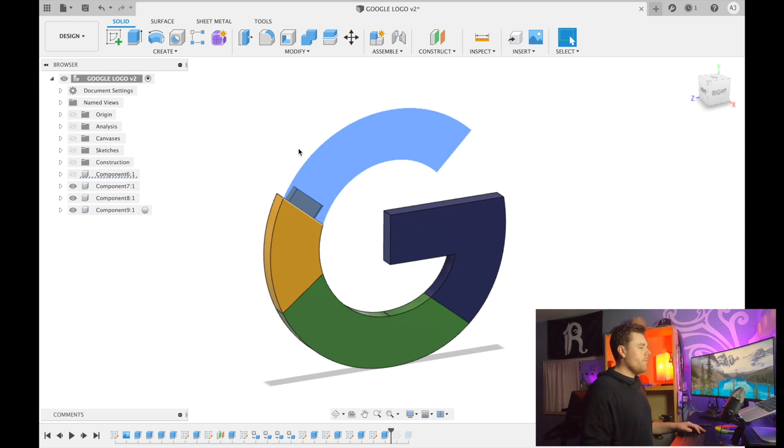Let's get started. Once we're in the Fusion 360 workspace, you'll notice I have 4 different components for this Google logo, each a separate color. I'll hide the first component so we can see I have an intersecting feature, which is this slotted extruded feature, to allow more surface area upon contact of the two 3D printed materials.

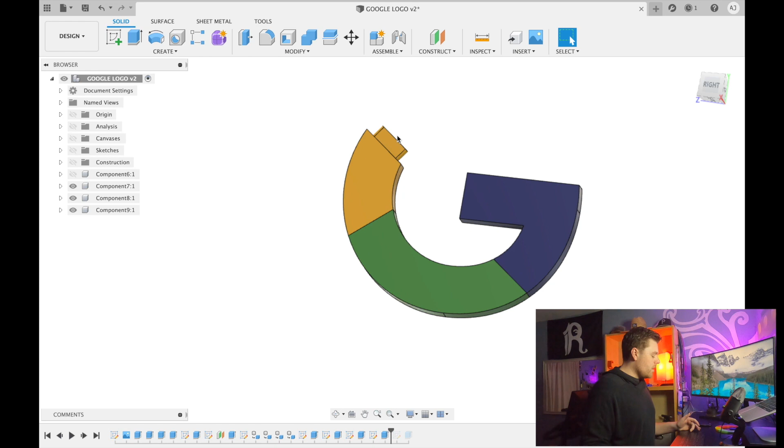If you have a single-headed extruder and plan on creating this all in one color, you could simply import the SVG file and export it as an STL file. But if you're utilizing a dual-headed extruder, it makes sense to have more surface area in the X and Y direction, so it utilizes more contact area and doesn't just split down the middle, like it would if you relied on contact surface area in the Z direction. So this is what I came up with, and it worked pretty well.

These are pretty strong, right? The yellow and red are the same print, just 2 different extruder colors, and that's not going anywhere. This is a press fit feature between the yellow and the green, and then the blue and the green again are just like the red and yellow. Excuse this for not being a very correct representation of what the green should look like in the Google logo—it's what I had.

Now, if you have a single-headed extruder and access to all these different colored filaments, although a little tedious, you could essentially create the same snap fit feature I have between the yellow and green, and do that all the way across throughout every single color.

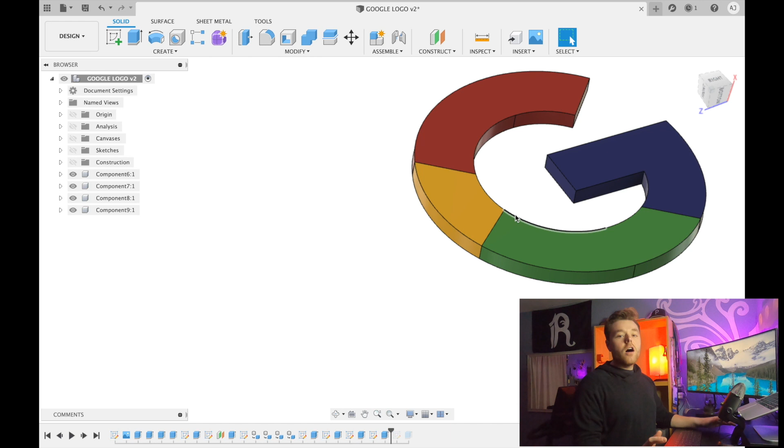So these are not a press fit feature, meaning there is no tolerance between this red portion and the yellow portion. Now when we go between the yellow and green components, there is a 0.2 millimeter offset around the slotted extrusion.

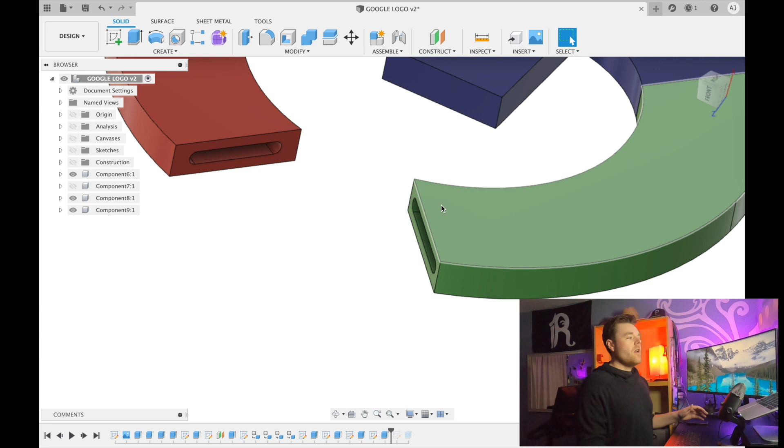The reason I did that is because I have a 0.4 millimeter diameter nozzle head, and I typically find that a press fit works pretty well at 0.2 millimeters for a 0.4 millimeter nozzle head. It's going to be different nozzle to nozzle, printer to printer, and I recommend you try it out yourselves and tamper with different press fit offsets and tolerances.

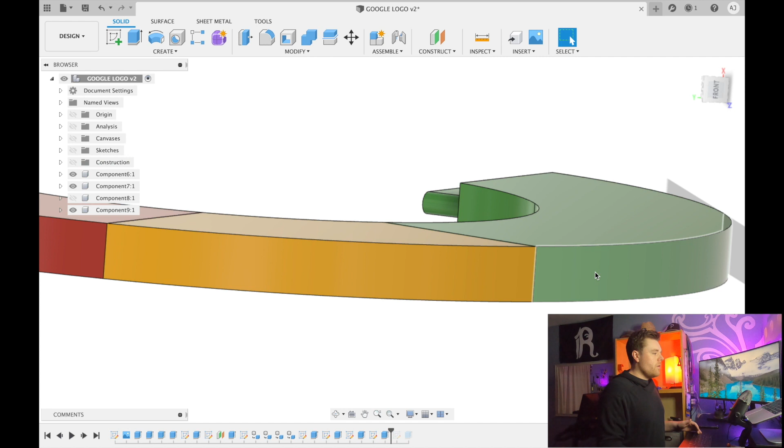But for the purpose of this video, we will be using a 0.2 millimeter offset between this green and the yellow feature here—oh, that's not the yellow feature, right here. So without further ado, let's jump right into it.

So we will create a new component here. Then we're going to save this as Google assembly, just press enter. And then we are going to go over to Google and type in 'Google logo SVG file.' Click on images, and make sure we find one with a transparent background. This one looks a little fuzzy.

Let's click on vector. Actually, I think this is where I found it. Let's see here—this one looks pretty good. This is seeklogo.net; I will link this in the description. Go ahead and right click on this and save as image. I already have this image saved, so I'm not going to do that.

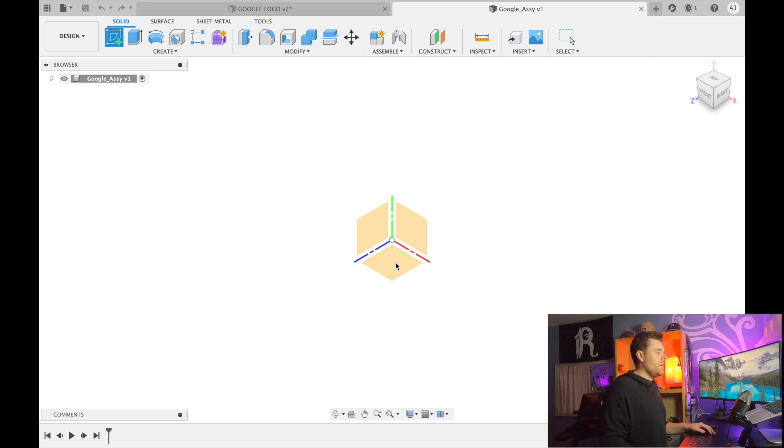Once you have that image, click on New Sketch. You can click on the top plane here. Then I'm going to create some construction lines. The reason I'm doing that is I know my printer bed X and Y are 8.5 by 8.5 inches, but I don't want the logo design to exceed that, so I'm creating some construction lines to create outer bounds.

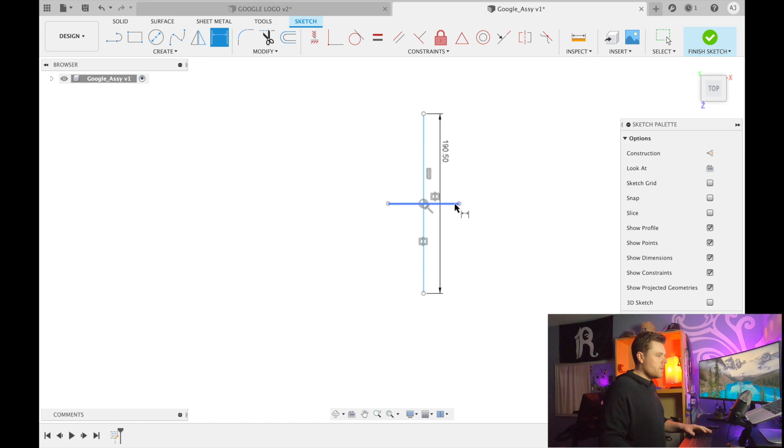So what I'm going to do is make this guy 7.5 inches, and let's do symmetry here. And make this guy 7.5 inches. Again, I'm straying away from giving step-by-step instructions.

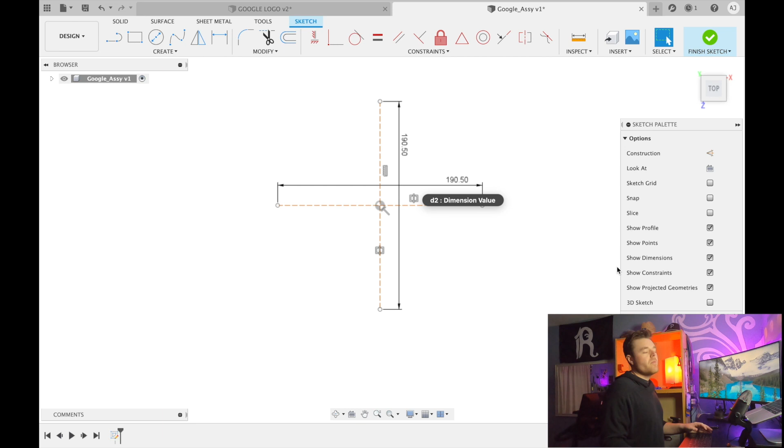I uploaded an absolute beginner's Fusion 360 tutorial for that exact reason. So if you're having trouble following along, I highly recommend you click on that video and learn more about Fusion 360 and some of the fundamentals of 3D modeling and design within Fusion.

So now we've got our construction lines that are all symmetric. These outer bounds are essentially 7.5 by 7.5 inches. Then we want to go to Insert SVG.

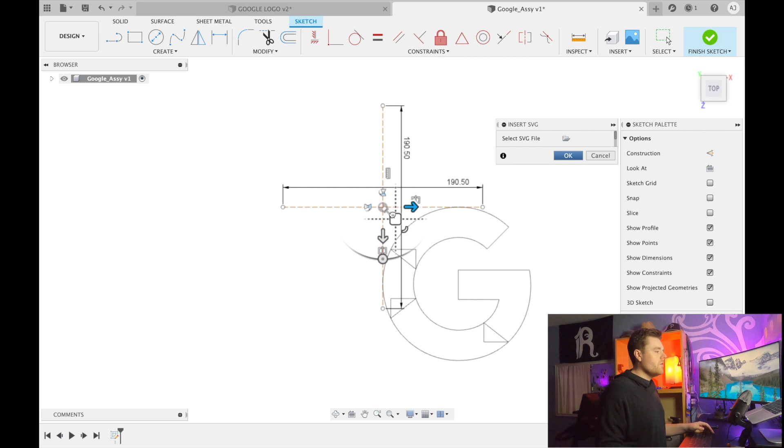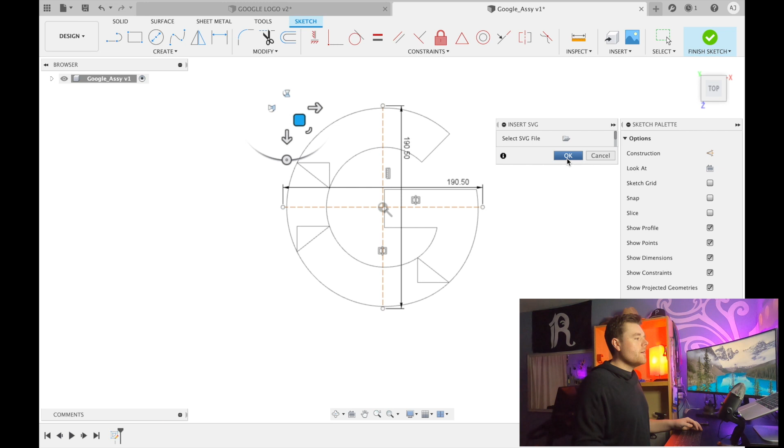Here's our Google logo. You can do this with any kind of logo you want as long as it is an SVG logo. Typically you can filter those out by selecting vector, which allows you to extrude enclosed surfaces that encompass that logo within Fusion 360. So it makes it very convenient, as you'll see. We will select OK.

It's already got all of the lines and curves we would like to utilize within this design, so we don't even really have to do any sketching except for the snap fit or press fit feature once we model this. So we've got our Google logo. This looks great. We will finish sketch.

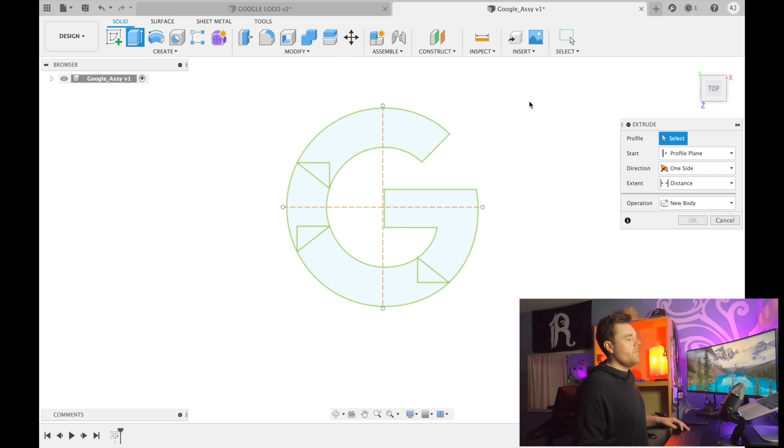Then we're going to go ahead and click on extrude. If you only have a single-headed extruder and only want to print it in one color, you could just select each of these portions, do 10 millimeters, and click OK. What you've got here is a Google logo, right? Pretty cool. From here you can go to the top left and click on 3D print. But for the purpose of this example, we're going to go a little more in depth.

So we will go back to the sketch, right click on it, and do edit. We will finish sketch, and we're going to actually delete this extrusion. Go up to the top left here, make sure our sketch is shown, and we're going to extrude just this first portion.

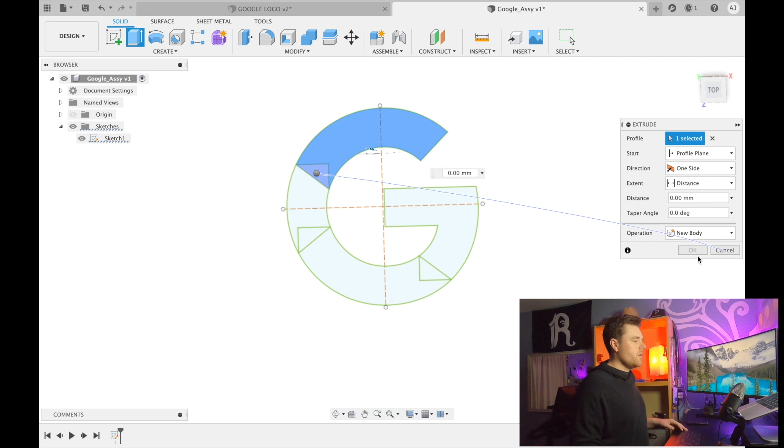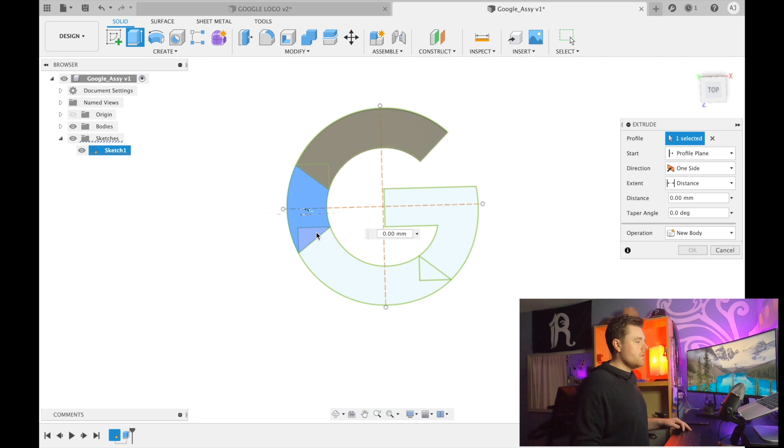We're going to extrude it the same amount, 10 millimeters. Oops, I forgot to select this, so we're going to go back and edit, make sure it encapsulates all of these different components. Click OK. Do the same thing, select this feature, select this feature. It did not select it again. 10 millimeters, but this go around we're actually going to do new body.

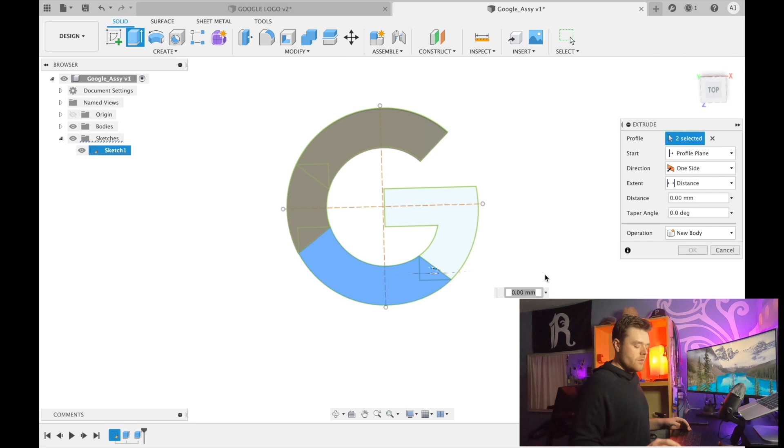That's going to essentially separate these two bodies, even though they're connected by a surface. Click OK. We're going to extrude again, 10 millimeters, new body, click OK. We're going to extrude one last time, 10 millimeters, and make sure it's new body.

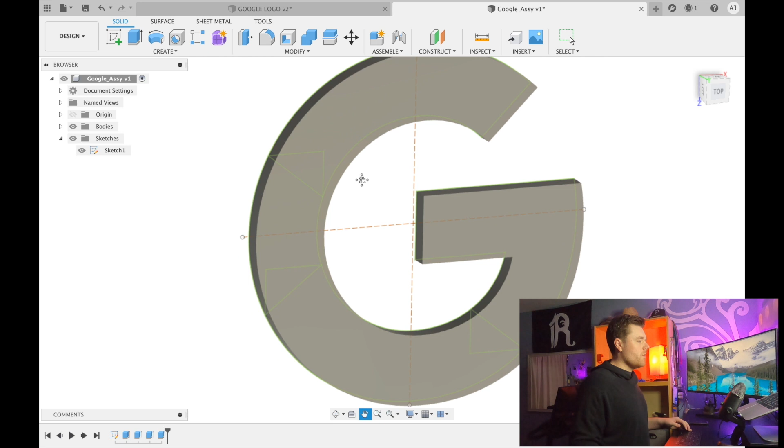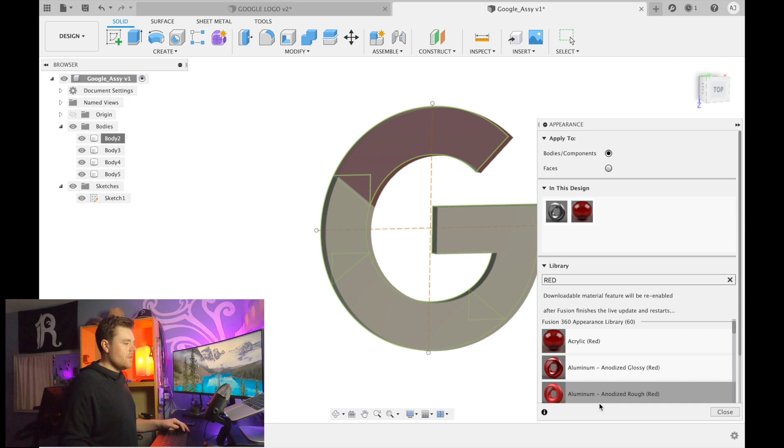Great, so this is what we're working with. And just to stay organized, we've got all these different bodies. Right click on each one and assign an appearance to it. Doesn't really matter what material it is, just kind of search by color. Acrylic red is fine, you could probably go a little more. Actually, that doesn't even look good. Aluminum, okay, that's fine. That'll look better than a transparent material for sure.

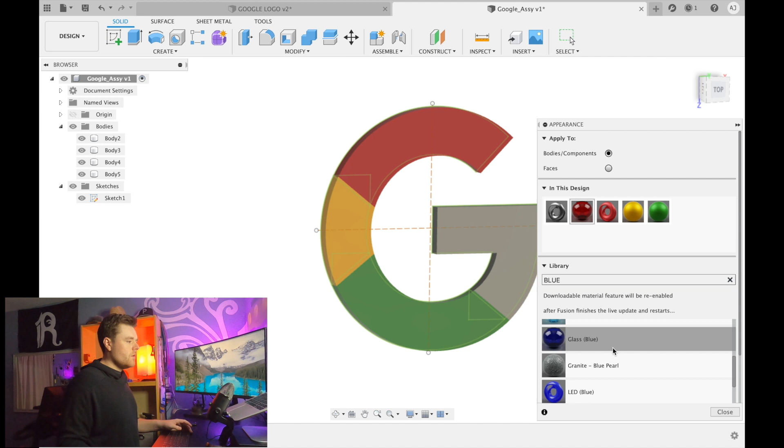Okay, there's red. Yellow. Plastic glossy, nah, I kind of like the matte finish better. Yellow. Green. And blue. Boom, and then click close. So that's just for our reference, especially when we're assigning different extruder heads specific geometric features to print. This will be very helpful.

So once we do that, we actually want to make some new components. The reason is that when we go to 3D print this geometry, at least when using a slicer like Ultimaker Cura, it likes to reference components rather than geometry. So if you export a component within Fusion 360 as an STL file, then select all those models within the slicer and do merge, it's actually going to remember the reference geometry that's correlated by component to component so that it knows where they are in reference to each other.

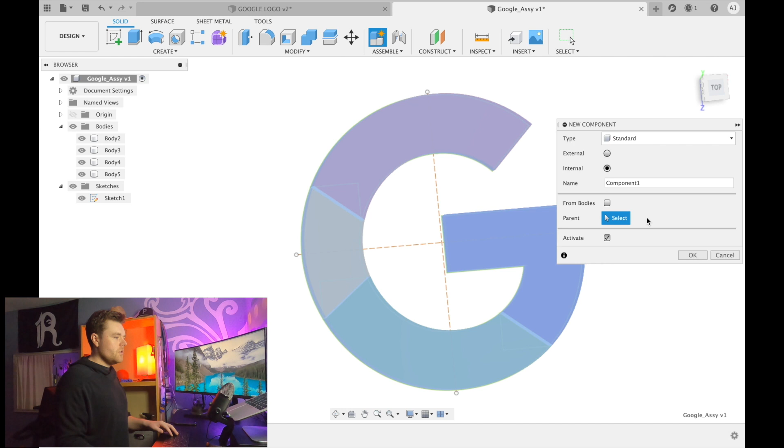So if you, for example, exported body 2 and body 3 here without assigning them a component, it wouldn't necessarily know where they should be located. That's the purpose of assigning these bodies individual components. So we want this to be just body 2. Okay, this is the parent, select OK. We should be able to drag and drop.

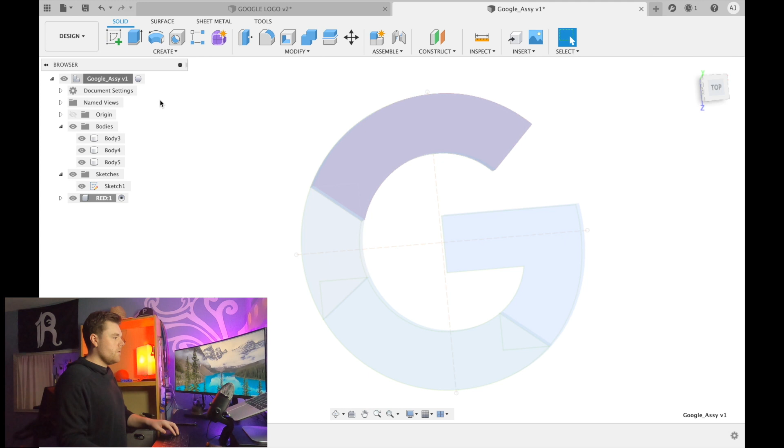Yep, so this component is now red. Just do new component, name this yellow. And we'll grab body 3, put it in there. Do new component again, we will name this green.

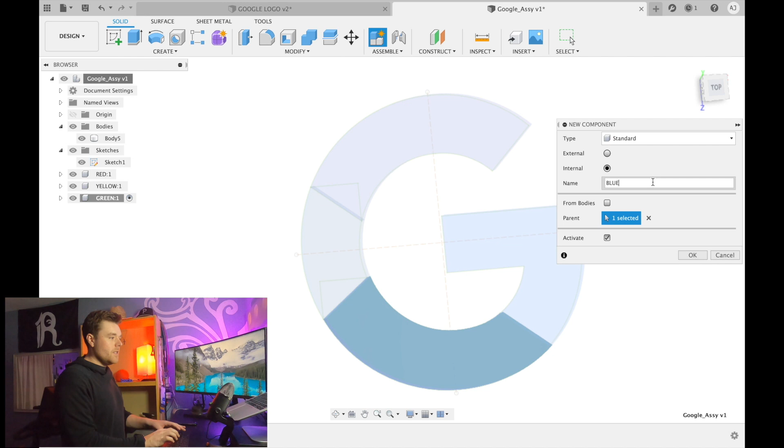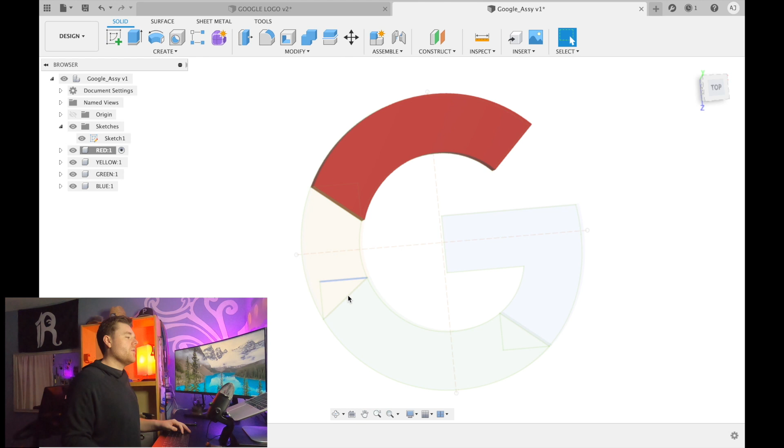So what I'd like to do is create essentially a press fit feature in between the green and yellow components. In order to do that, we go to green, highlight it, then we're going to hide the yellow, and then click on this face here and do sketch.

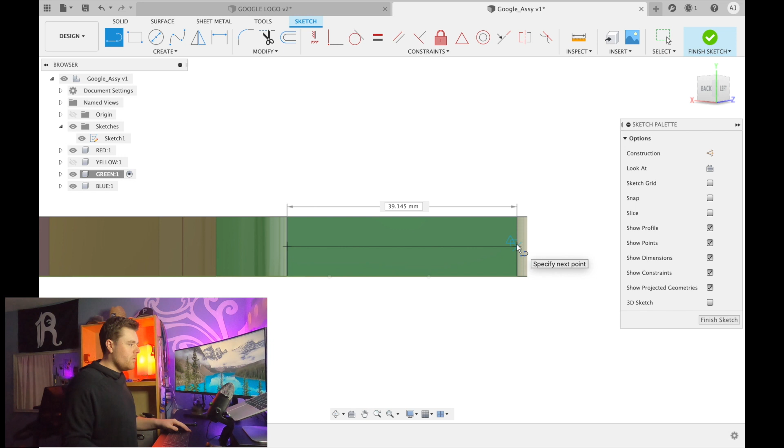I think my mesh visual, yeah okay, shaded with visible edges only. I really like using that. I don't know how I made it this far without having edges visible, but it's just one of my pet peeves. We will create a line from the middle to the middle of either edge, just to give you some reference. This is essentially what we're doing. Go back to look at.

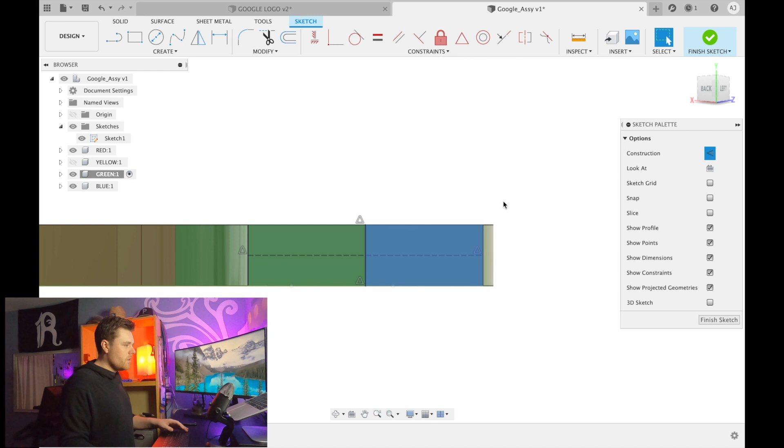Then we want to make this a construction line. We're going to do the same on the bottom, making this guy a construction line from the bottom to the top. And then we're going to go to create slot, center to center.

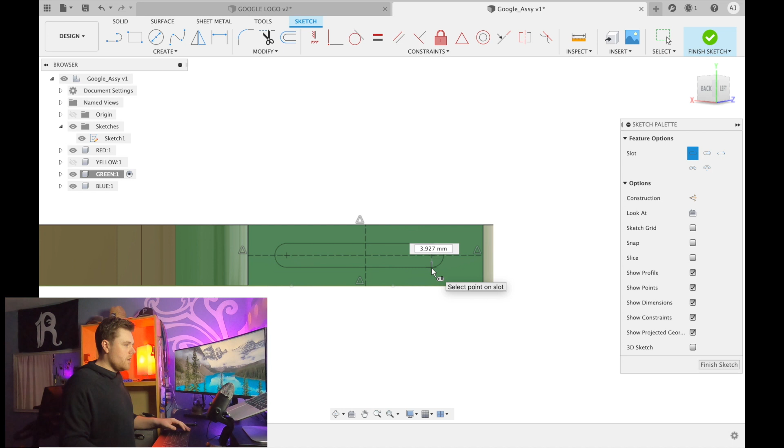Okay, great. I do not want this to be a construction line, so we click X or select X on the keyboard. Great. And we will start assigning our dimensions here.

I'm going to give this an offset of 4 millimeters. That wouldn't even be possible because the thickness is only 10 millimeters. Actually, let's do maybe 3.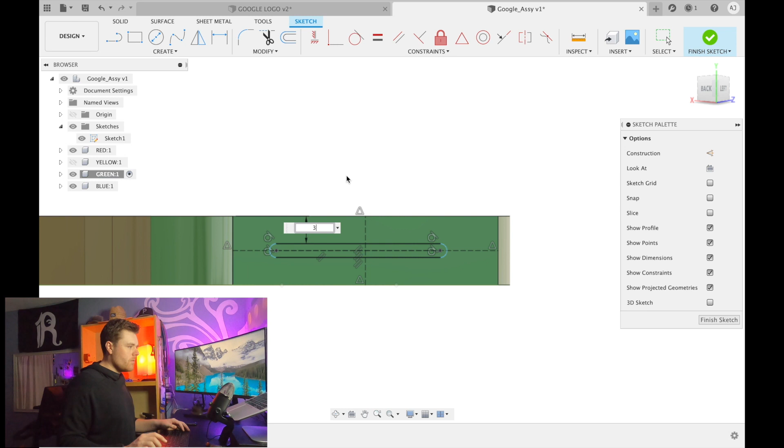Yep. And then let's create a line that is a construction. Click X from here to here. That allows us to select up a point when we are defining a dimension. This guy, let's just do maybe 3.

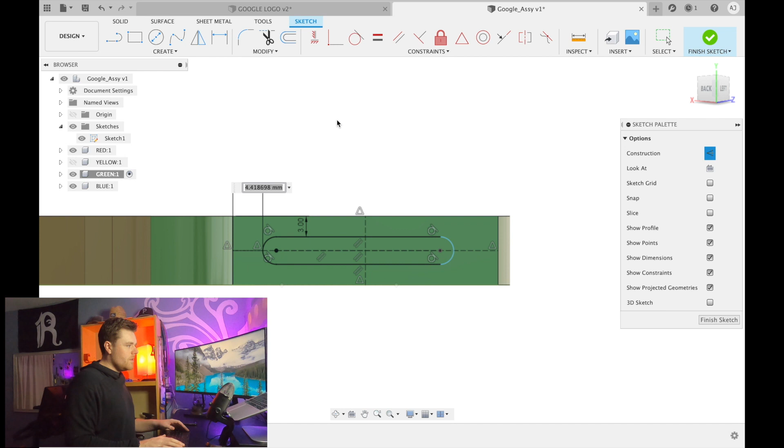And we want this to be symmetric, so we will select both of these and the center line to make it fully constrained. Great, and finish the sketch.

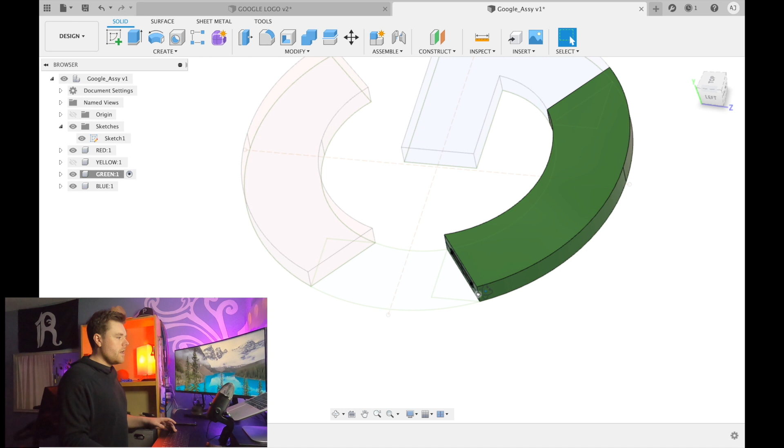Okay, let's go ahead and extrude this the opposite direction, so I'm just going to do -10, I think will work.

And I want to make sure that there's enough space. I think that should be enough. I'm not necessarily concerned to it. This is not a model that, once physically printed, will be susceptible to structural loading conditions, so I think that wall thickness is okay. Again, we're not injection molding this, so uniform wall thickness doesn't really matter, so we will do okay.

Let's highlight our yellow component and then we'll activate it. Now let's hide the green one and sketch on this yellow component face.

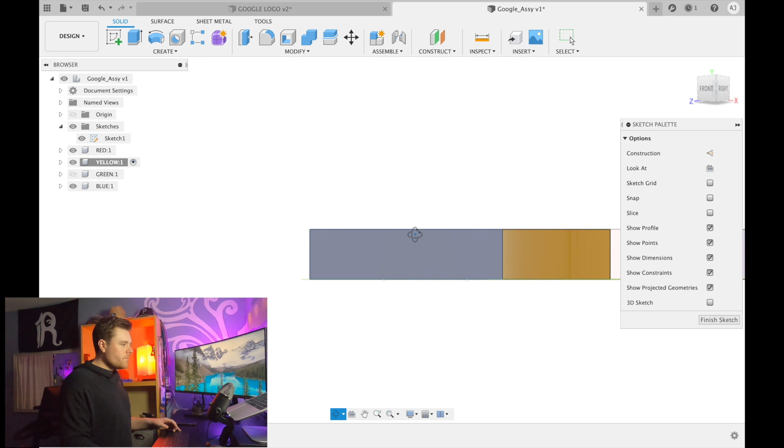We're going to create a sketch, but save a couple steps here. Highlight the green component, hide the yellow, and essentially just project the geometry that we just created onto the face with which we are sketching on.

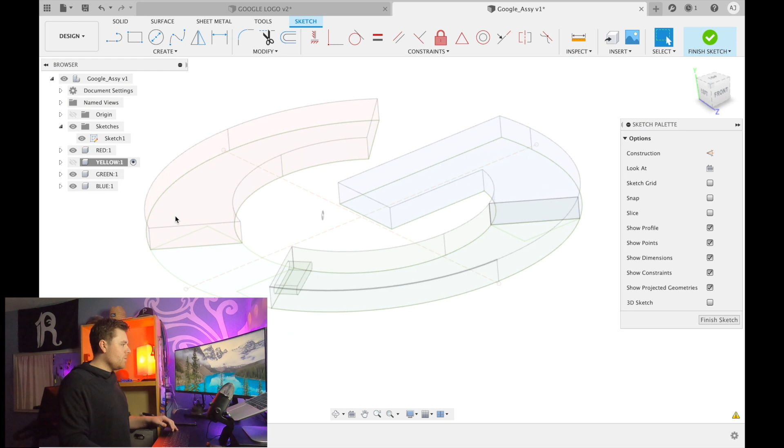So we can't see it right now because we hid the yellow component. Let's hide the green one again. Look at the face we're sketching on. Oops. Great.

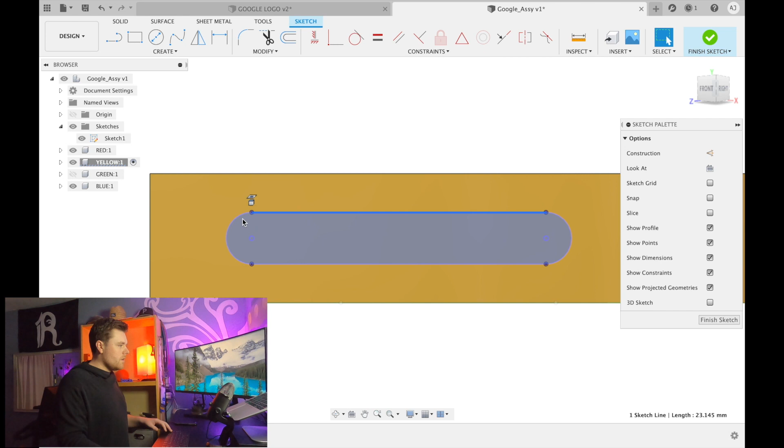And then what I'd like to do is make all of these—whoops, didn't want to delete that. Command Z. Make all of these construction lines.

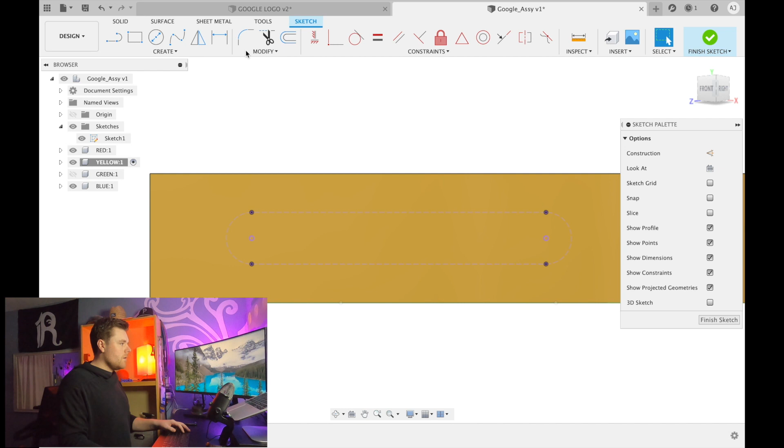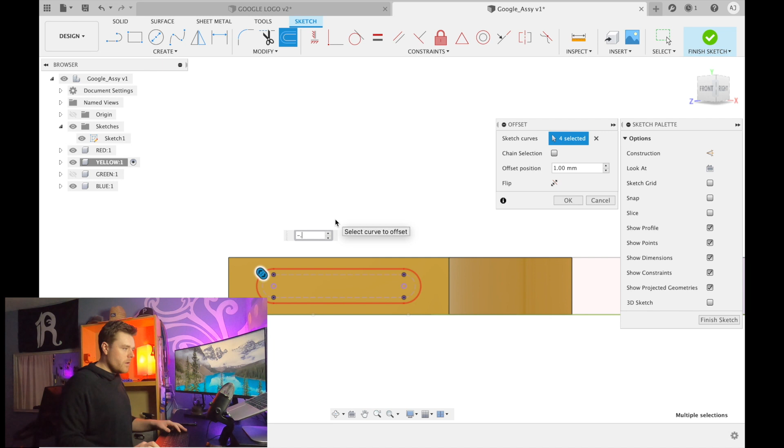Okay, and then we will create an offset of, you guessed it, 0.2 millimeters, and I am not holding command, so we're just selecting individual components. Okay. Modify, offset. -0.2. Make sure that looks pretty good. Click OK. And we can see that this is now 0.2 millimeters smaller than the feature that we just created.

And we are going to extrude this 9.5 millimeters to allow 0.5 millimeter of clearance between the end of the slotted hole that we just created. 9.5. Great.

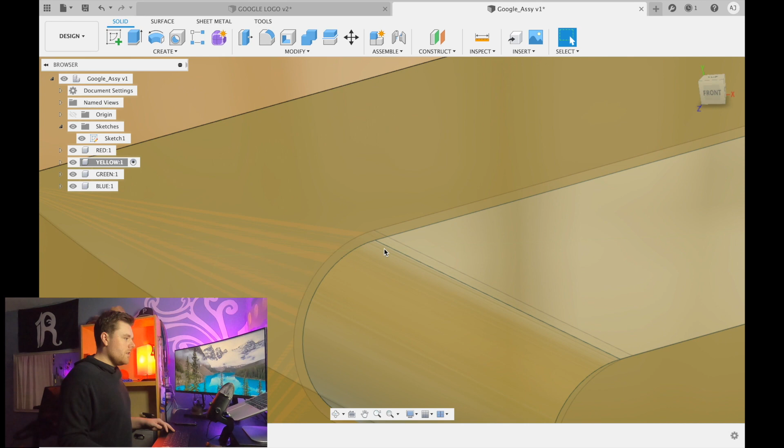Okay. So let's go ahead and show this. So as you can see, we've got 0.5 millimeters of clearance. And then if we kind of rotate it, you'll see that the yellow component does not go all the way up to the edge. There's this 0.2 millimeter gap in between those two components to allow for a press fit. Again, I highly recommend just kind of testing different offsets for a press fit feature to feature solution that works for your printer specifically. Okay, every printer will be different.

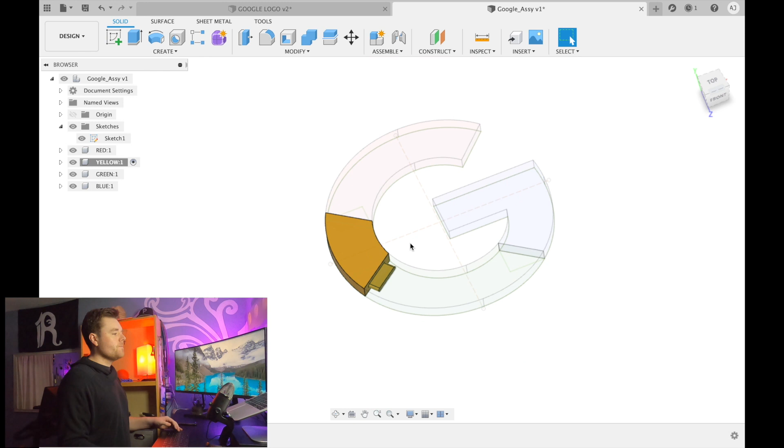Okay, so now that we've done this, what I would like to do is we're still going to work on the yellow component, but we're going to hide the red one here. And then we're going to sketch on this side of the yellow component.

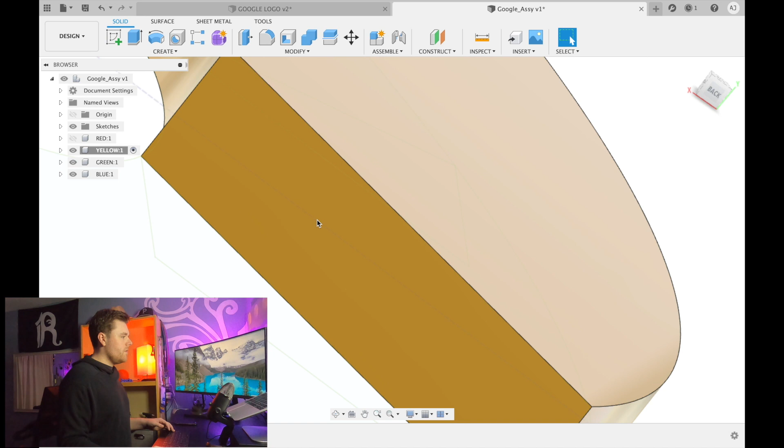Now these will not be press fits. What these will be, and I mentioned this earlier, but these will be essentially geometry that's going to help with the structural integrity of this model.

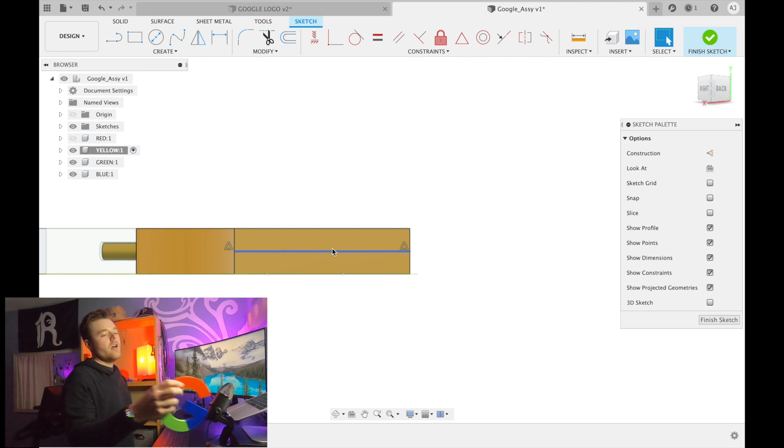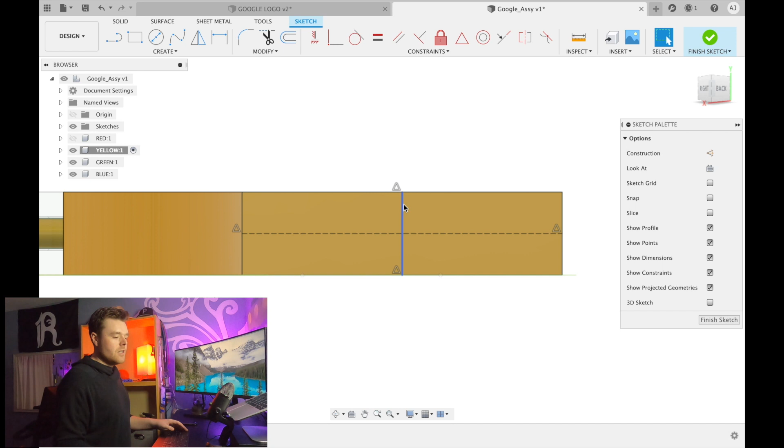And you'll see what I mean as we get into Ultimaker Cura, and I have a time lapse which half of the first portion didn't even work, so we're going to use it anyway, but I think you'll get the point. So I think once I lay that time lapse over, you'll see like half of the first, it's either red or yellow components being printed, and then the full green and blue. It might be the other way around actually.

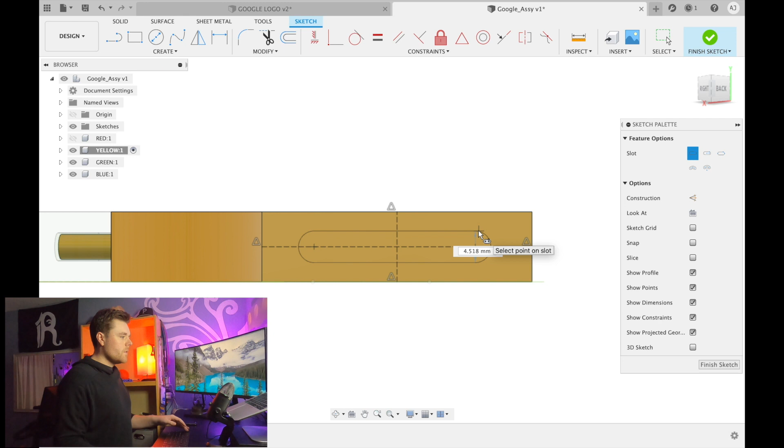Okay, and then we'll go to slot, center to center. Okay, and dimension, make this 3.

Line, make it a construction. You could also probably just put a point here instead of doing this construction line. It's just, sometimes you get into habit forming techniques when modeling, so that's a habit of mine. We'll make this 7 millimeters, I think, and make these symmetric.

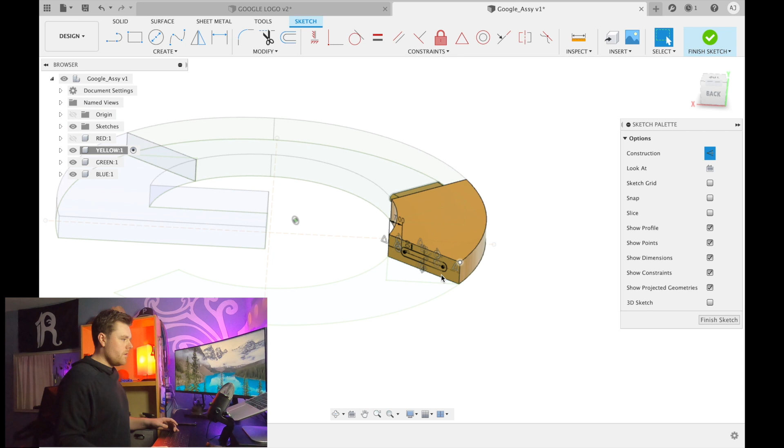Okay, looking pretty good. Finish sketch. We're going to select this area we just sketched and extrude it, you guessed it, 10 millimeters. Click OK. 10 millimeters seems to be the key of this entire model. 10 millimeters thick, 10 millimeter extrusions.

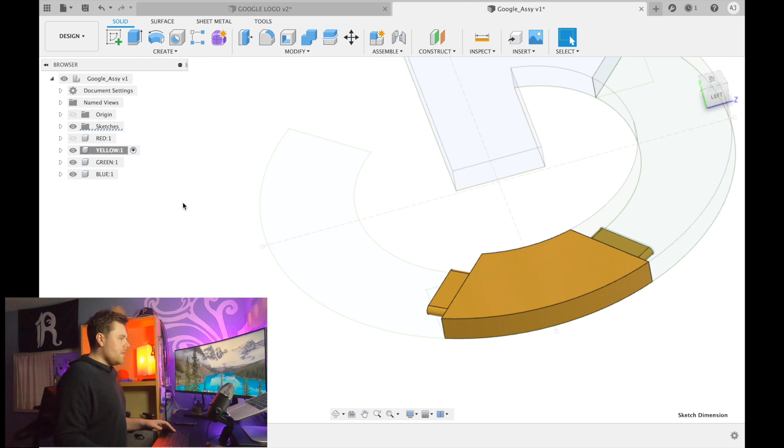Okay, now we're going to show the red model and activate it. And then we're going to hide the yellow component. I keep saying components versus model. They're components. Hopefully you understand what I mean.

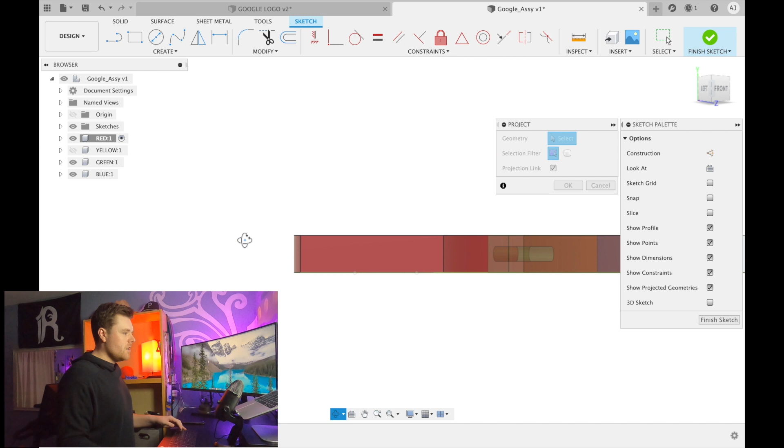And we're going to sketch, and then we're going to press P for project. Shift middle click so that we can see what we're working with, show the yellow component, hide the red one, and click on the surfaces that we just extruded.

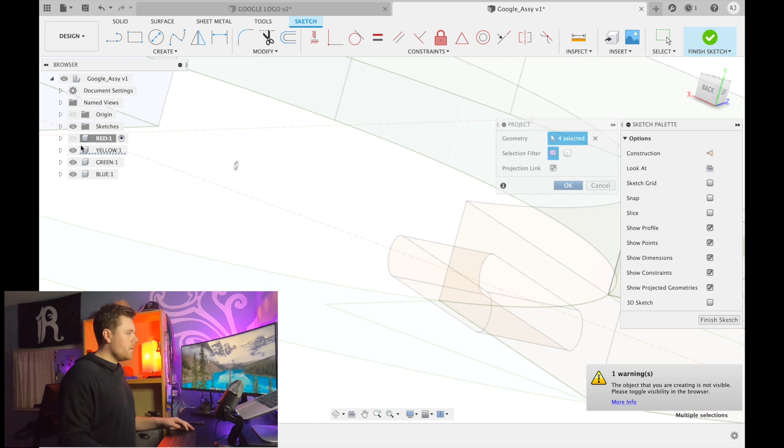Click OK. Oops, and then it says the object you were creating is not visible, so of course it's not, because we need to show the red model or component.

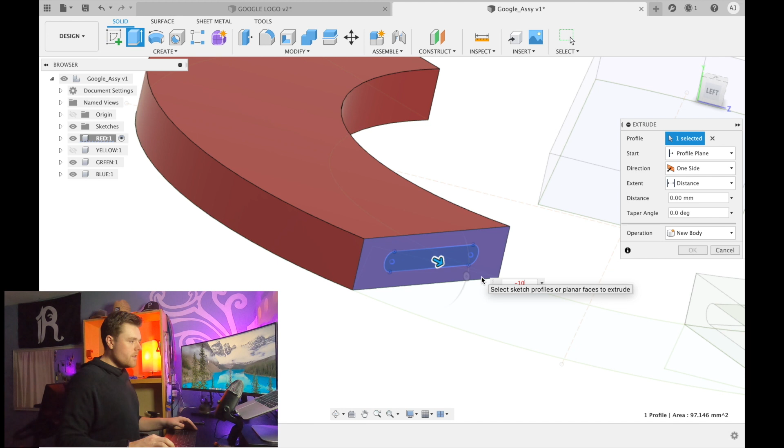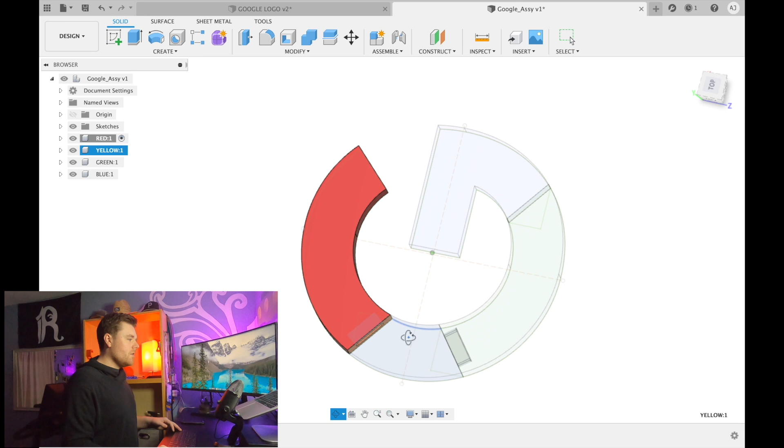Finish sketch. Now this is the one unique thing about this: we're not creating an offset, and the reason is we don't need to, because these aren't going to be press fit into each other. They're going to be one solid 3D printed model in two different colors. Instead of relying on the Z-axis for plastic welding or bonding, it's going to use all of the surface area contact based on the slotted feature interference we just created. So that's my two cents. You could model it differently, but that's how we're doing it in this video.

Okay, and then we'll do the same thing between the green and blue components. So we'll go to green, hide the blue one, sketch.

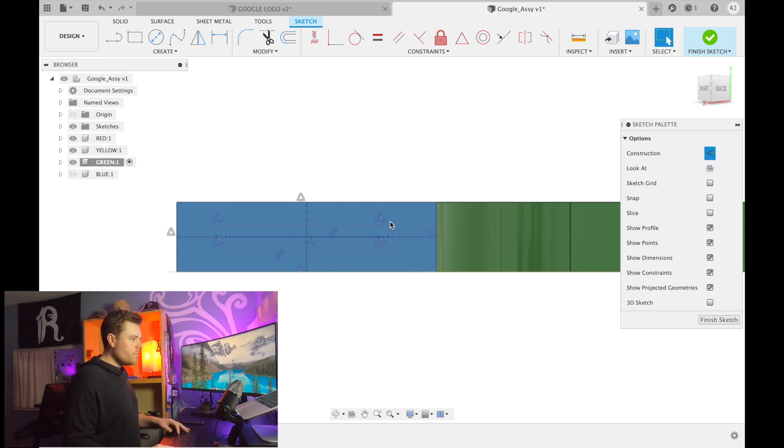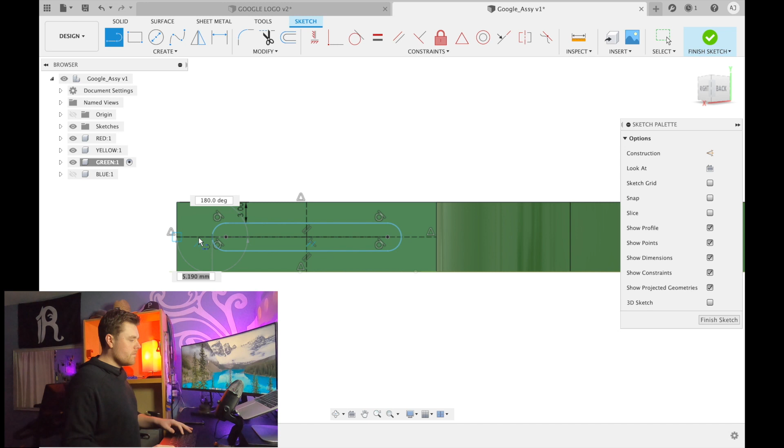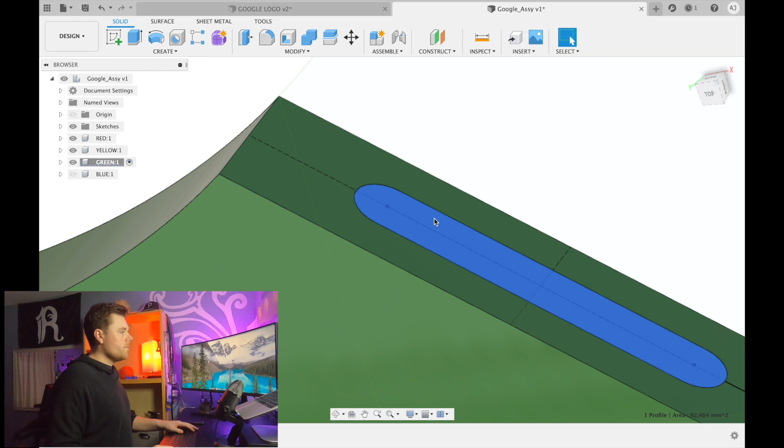So dimension, make this guy 4 millimeters — oops, 3, sorry — from line X. This guy's 7. And we'll make these symmetric. Finish sketch. Extrude 10 millimeters.

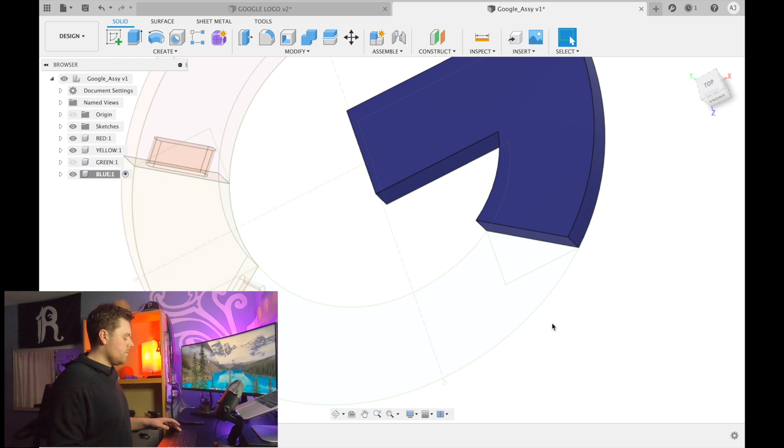Okie doke, and we're going to do the same thing here. So let's show this blue component. We're going to activate the blue component here, hide the green one, and then sketch. P for project. Hide the blue one, show the green. Click OK. Show the blue, hide the green. And finish sketch.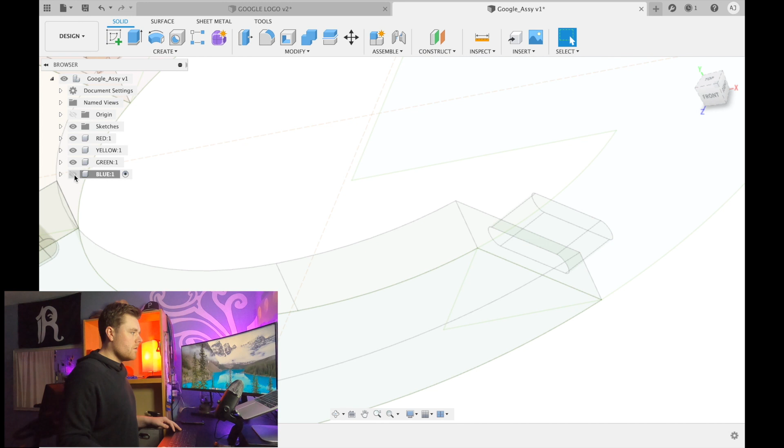Okay, we're going to extrude this negative 10 millimeters. Do OK. And show the green just to make sure we've got this. Great.

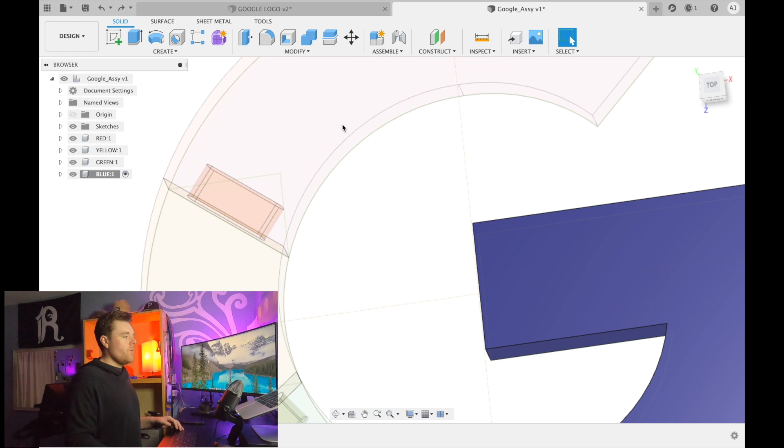Okay, that's all there is to it. So now we're going to send these over to Ultimaker Cura. What we want to do first is these will need to be printed in two different operations, even with a dual-headed extruder, because we can only incorporate two materials per print. So how I printed this was the red and yellow component first, and then the green and blue one next. I'll show how to incorporate one of them, and that should be all you need to successfully 3D print this model and snap them together, or press fit them together.

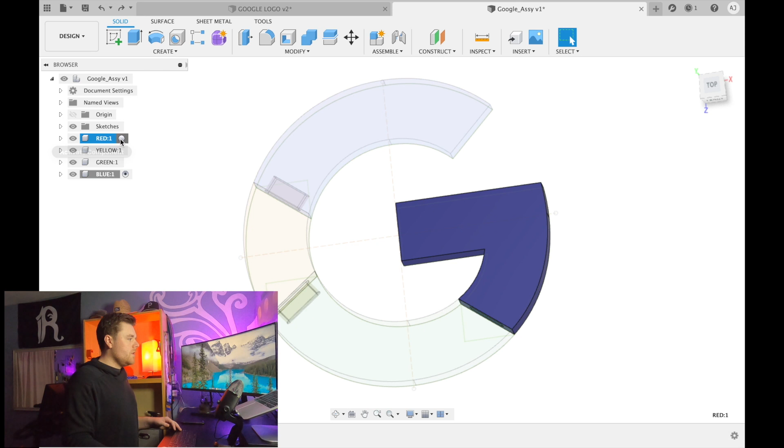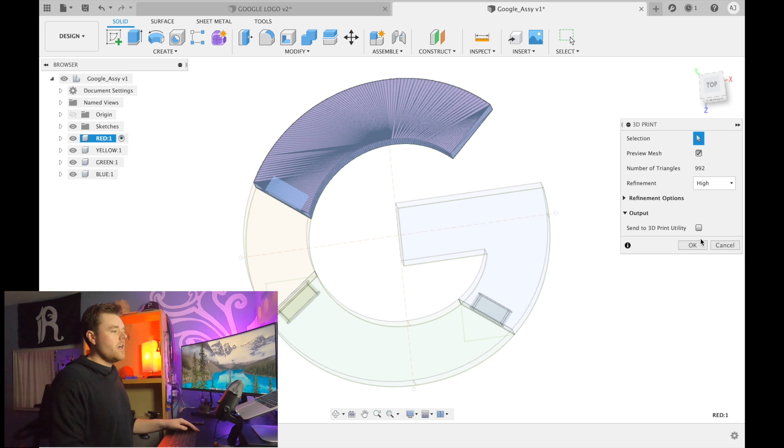So we'll just do these guys. Let's activate the red one, select the red component, and do 3D print. Make sure the refinement is on high, then click OK. We can send to the 3D print utility — use this if you already have Cura installed. If you're using a different slicer, you can unselect that, press OK, and save it to another file destination. I'm just going to use send to 3D print utility because it's been working pretty well for me.

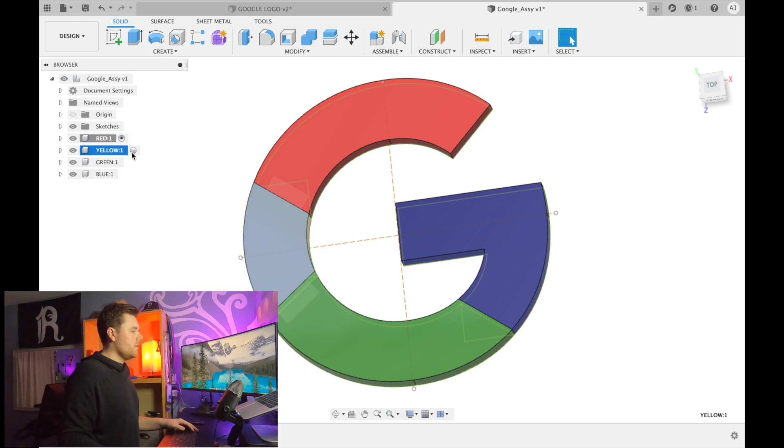As we go over to Cura, you'll see it just imported there nicely for us. Then we'll go here, activate the component, click on the component, 3D print, looks pretty good, and click OK. And now we are in Cura.

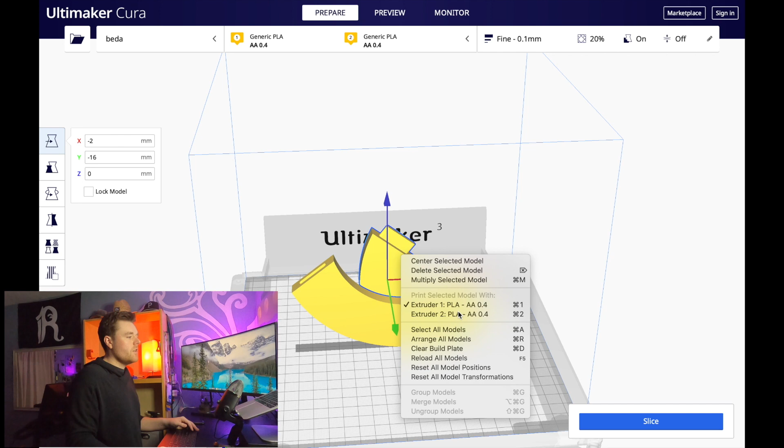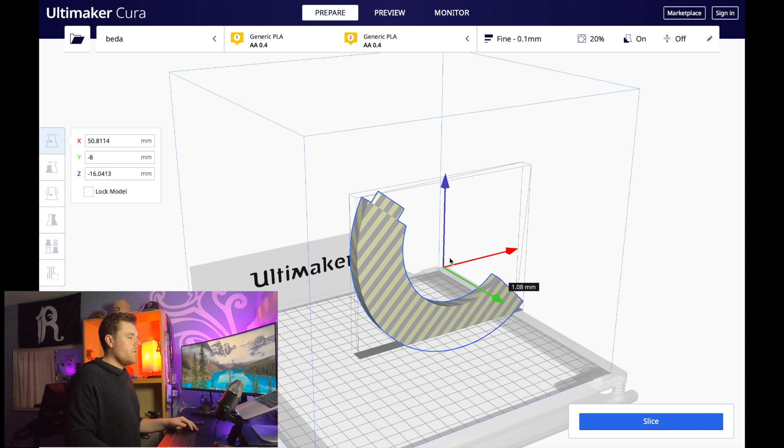So assuming our left, or extruder 1, is red and our extruder 2 is yellow, extruder 1 can be left as is, but what we need to do is define this yellow component as extruder 2. So we'll right click and select extruder 2, and you'll notice it's more of a dark yellow color now. Next step is to right click, select all models, right click again, and do merge models. What you'll see is it becomes one 3D printable model with different colors assigned to the red and yellow components.

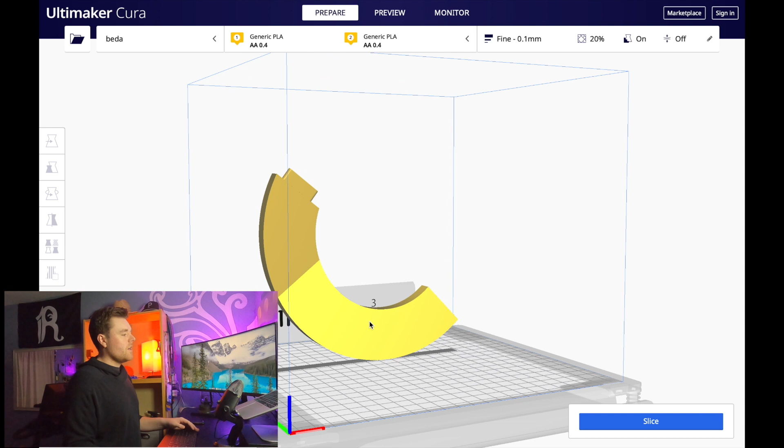This is really helpful, especially if you don't want to print this all in white and then acrylic paint everything manually. Again, you do have to have specific printers, more specifically a dual-headed extruder printer, to use this functionality. But I highly recommend it — I think it's super fun and adds a bit more flavor to some of your 3D prints and the capabilities of the prints you can create.

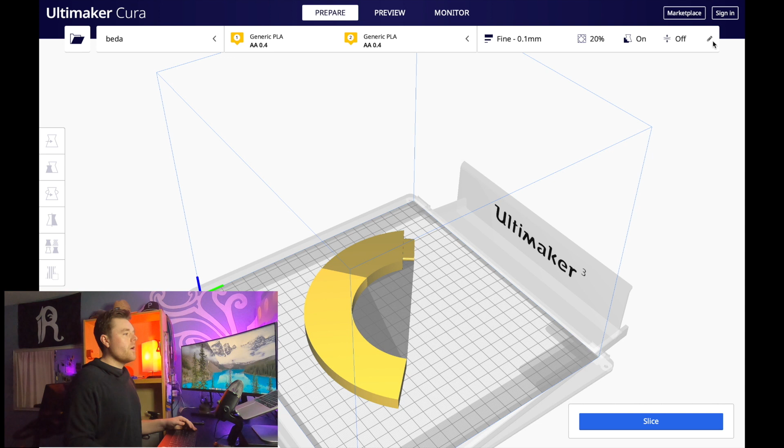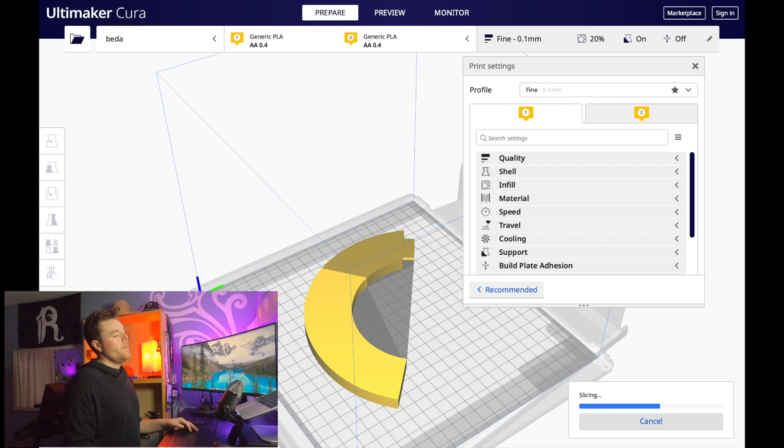So there we have it. You can go ahead and select different printer and slicer settings — we're not going to go into that, that's not the purpose of this. If we sliced this now, we would be presented with a G-code from Ultimaker Cura that we could then send to our 3D printer and successfully print a two-colored Google logo, or half of a two-colored Google logo, that is.